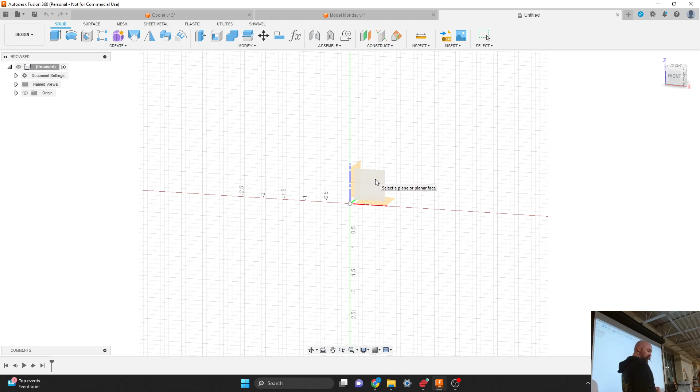How do you do that part? Like, how do you make it move like that? The navigation cube up in the top right-hand. Oh, you're good. You're editing your sketch already. You are already good to go.

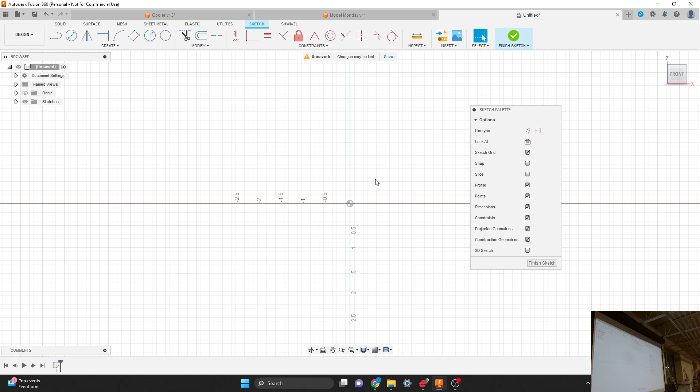Yeah, you are. So you've got all your sketch tools at the top, just like I've got mine. We've got a sketch palette here. So now we can make a circle. Fancy.

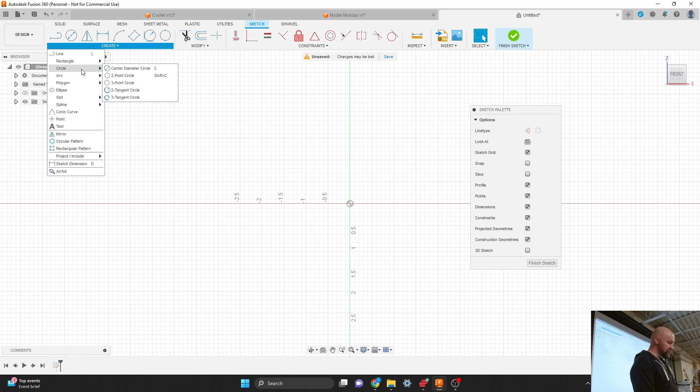So from our Create menu, I'm going to come down to the circle option here, and I'm going to choose to make a center diameter circle.

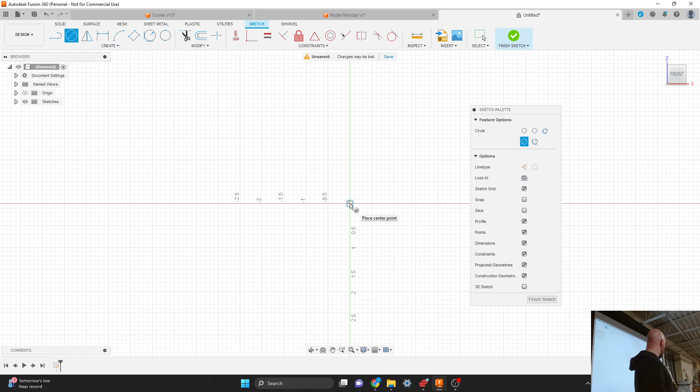Now, if I just stop moving my mouse, it'll tell me what it wants me to do. My Fusion Overlord will command me to place the center point. You may remember from my various words that I say about connecting things to our origin. When you're starting from 0, it's really handy later on if you connect things to your origin, just to fully constrain things in space and in dimension, which we are doing right now.

Something also that's important to note, maybe for beginners, most of the sketching tools are going to be a click, release, and then move, as opposed to a click, hold, and drag. So if I grab my circle tool here, my center diameter circle tool, and I click and I hold and I release.

There you go, that'll work. It doesn't let me. Maybe you have to select the delete object.

So there, if you go to create, and then circle, and then center diameter circle, you'll want to place the center right at the middle there. Now you can click and move your mouse out.

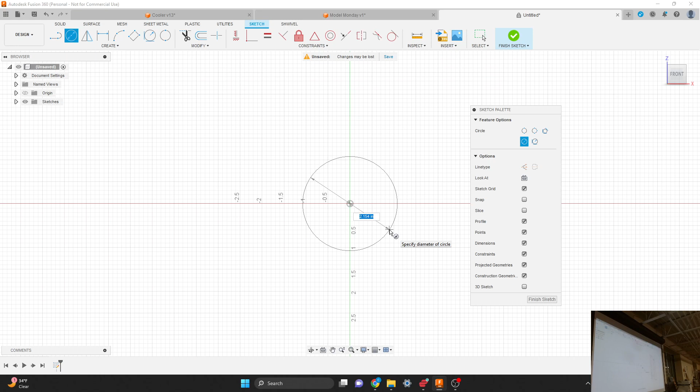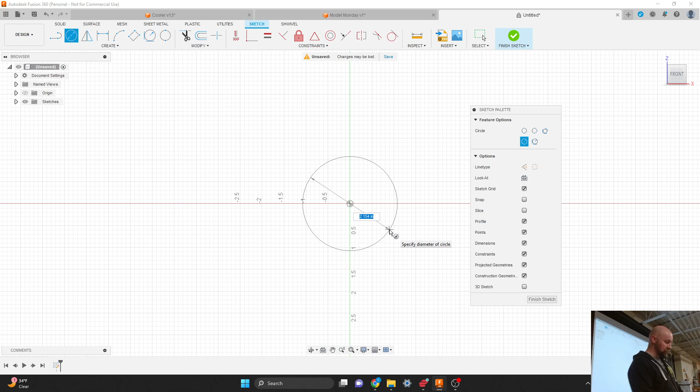All right, the dimension that this particular motor is, probably, yeah, it is definitely based on the metric system, which is not surprising. This is 24 millimeters. If you're not drawing in millimeters, it's okay, don't panic. I am not drawing in millimeters. 24 millimeters, I can just type in 24 and then hit MM.

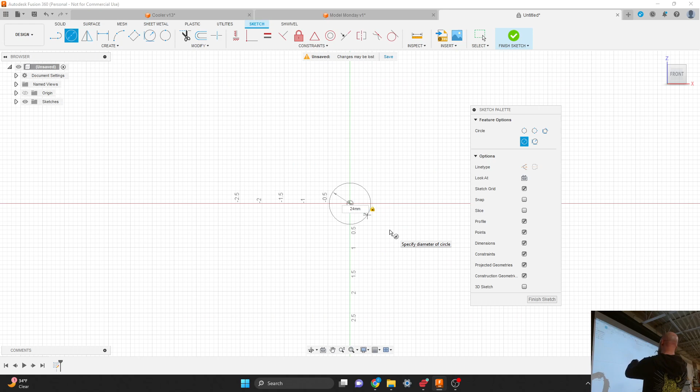An inch is 25.4 millimeters, that is impossible to know for sure. Yeah, this is roughly 0.945 inches. But if I switch over to millimeters here, it's like, oh, 24, right on the dot.

All right, cool. And then I'm going to hit enter. You'll notice it does that conversion for me automatically. So, auto-magically.

If you want to, you can click and drag on this dimension and you can place it somewhere else. I like to put these outside of the circle just to make them a little bit easier to read.

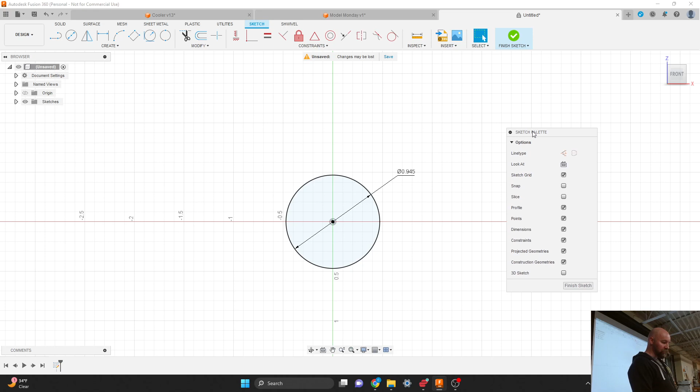And once we've got our circle, we can go ahead and say finish sketch. Maybe it can't be that small. It is not. So this is just the beginning.

So now I'm going to click on my create menu here. You said what was the numbers? It is 24 millimeters. 24 mm. Correct.

That does not look like 24 millimeters. All right, short of deleting it and recreating it, and I didn't, but if I got that wrong, every time I try to click on it, it changes something else. You typed in the wrong number? No, I'm saying if I did, because I was playing with it earlier.

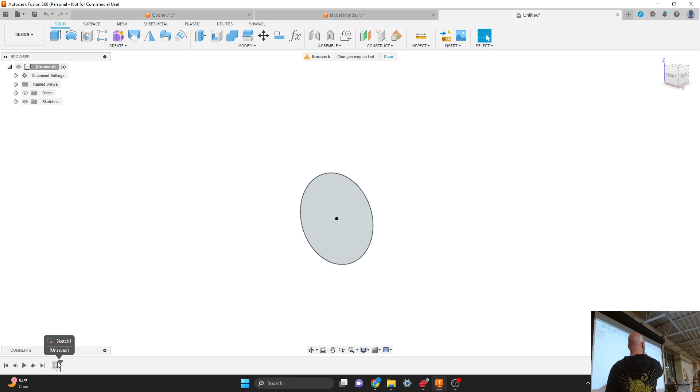No worries. So if we wanted to change something about this circle, and we've already finished our sketch, I can right click on the sketch down in my timeline, and I can say edit sketch. And then I'll go back in time to when I was making the sketch, and now I can double click on this measurement, and I could change that measurement to something else if I wanted to.

Oh okay, gotcha. Or, let's just say, for example, you don't have any measurements to change. Let's just say you made a circle and you forgot to add a measurement to it. From my create menu here, I can find this sketch dimension option. So if I didn't put my measurement on while I was making my circle, I could go to the sketch dimension option. I could click on the circle, and then I can click a second time to place that measurement wherever I want to be. And I could call it 24 millimeters, and if it was a different size, it would change the size of that circle. My circle's kind of small, but it's cool.

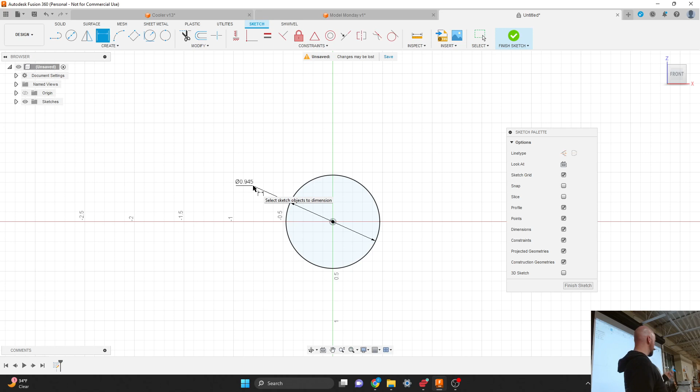It's a small motor. Yeah. Thank you. It's a Ringo-sized motor. All right, now I'm going to go ahead and say finish sketch.

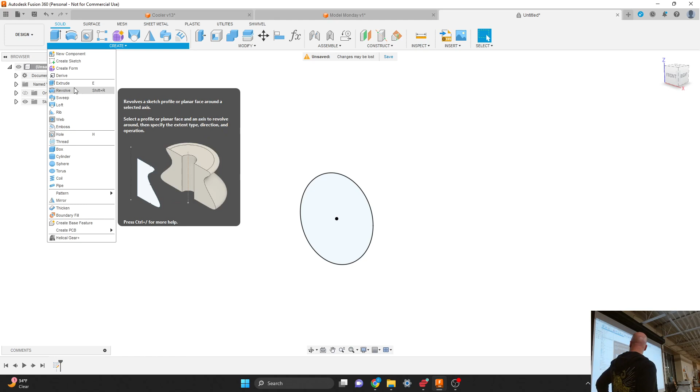Let's go ahead and extrude out this shape here. So from the create menu, I'm going to come down to the extrude option, and I'm going to extrude out this little cylinder here. A grand total of, hey Steve.

You said extrude? Extrude. That's in the create menu? Okay, yeah, I'll try and find it.

Oops, you're still in your sketch. Finish. There we go. Get on your sketch. And I can't -- see, you're such a good teacher. Yeah, you look, people know what to do. I love this, I'm gonna take the rest of the night off. You guys got this, right? Thank you, thank you, thank you. All right, cool.

So once we are extruding, we can choose a distance that we're going to extrude this. So I'm going to, in my extrude window here, I'm just going to choose to make this 28.

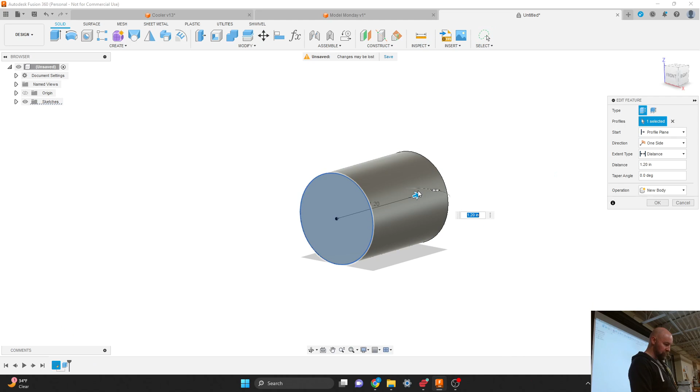Oh geez, what happened? Command Z, Command Z. 28 millimeters.

I know, it's like this motor was designed for the entire world. Well, crazy most. Yeah, yeah, except for Myanmar, Liberia, and the United States. The most free countries. The free world countries. Yeah, exactly. Yeah.

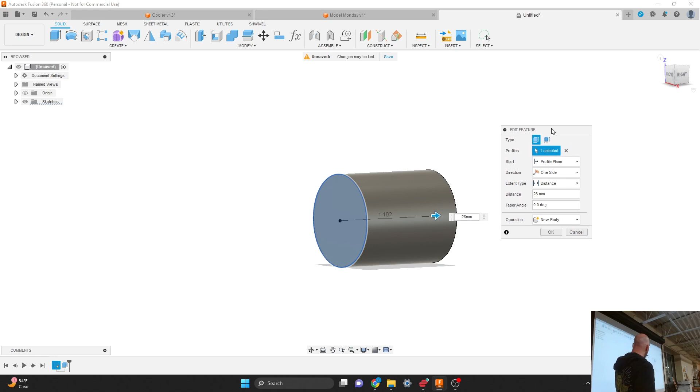All right, so we're making this a new body, 28 millimeters. And I'm going to go ahead and say Oakley Dokley.

All right, let's do some housekeeping. So we've got a sketches folder here that's got an unnamed sketch in it. We've got a bodies folder here that's got an unnamed body in it. Let's go ahead and solve both of those problems right now. This is going to be the sketch that is our motor. Let's just call it the motor.

So to name a body, there's a couple ways you can do it. You can right click on the body and say rename. Mine's not working.

Or the other way is you click, pause, and then click a second time. I'm going to call it the motor. Wait, that was the body? I named my body and my sketch the same thing because I am crazy like that. I'm gonna call it the body.

Wait a minute. Anything is better than body one.

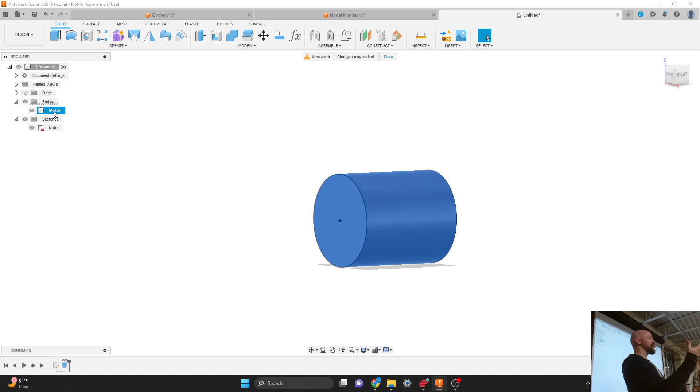Mine just says sketches and origins. That's because you gotta click finish sketch and then it'll show the body again. I did the same thing, I ended up editing the sketch. You clicked too fast. So if you double click on the sketch, you go back to editing your sketch.

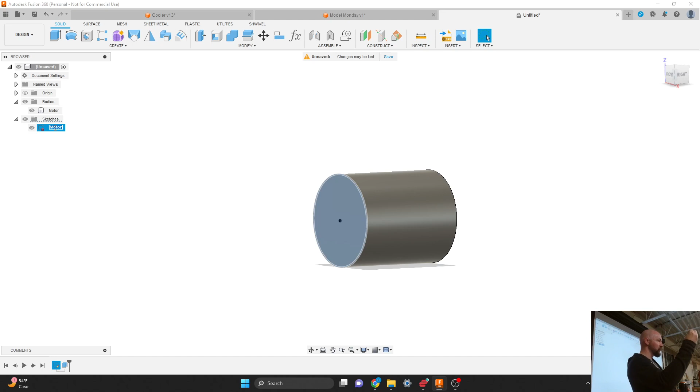To rename, you gotta click, pause, click. You can't be too anxious to rename things, you must exude patience. Patience, Padawans. Yeah, exude and extrude. Exactly.

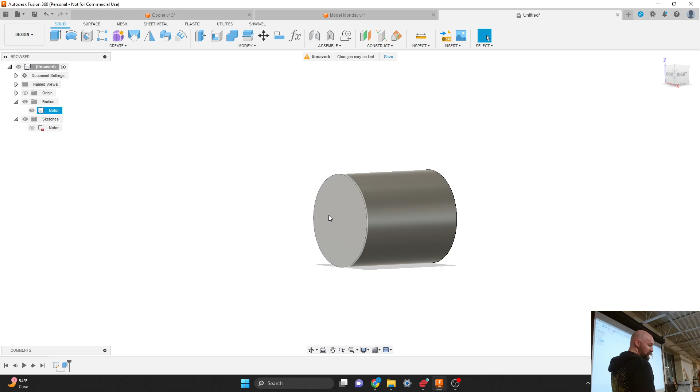So I'm going to hide my motor sketch because I don't really need that anymore. I am going to make the two caps. Our motor here has caps at the front and back, so let's go ahead and make both of those right now. Conveniently, I don't need to make any sketches to make those caps, because any flat surface I can extrude. So from the create menu, let's come down to the extrude option one more time.

Or we're going to actually use the extrude more than one more time, we're going to use it several more times. That was a lie, I just lied directly to your faces and I apologize.

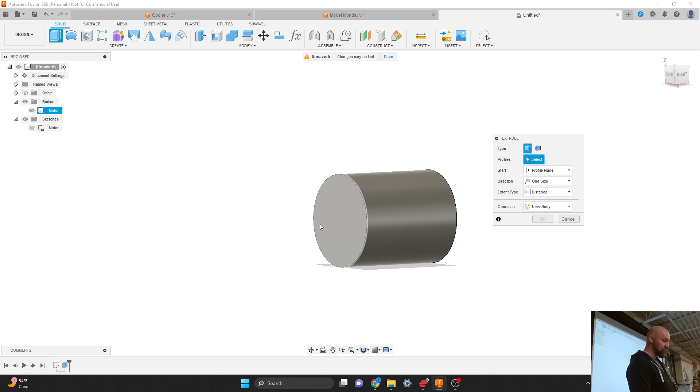So we are going to extrude out one side of our cap, 1 millimeter. Now the operation here is defaulting to join. That's because whenever we've got two bodies that are touching each other, it defaults to say we want to join these together into one body, and we do not want to do that. We want these to be separate bodies. So from that operation menu, we can change it from join to new body.

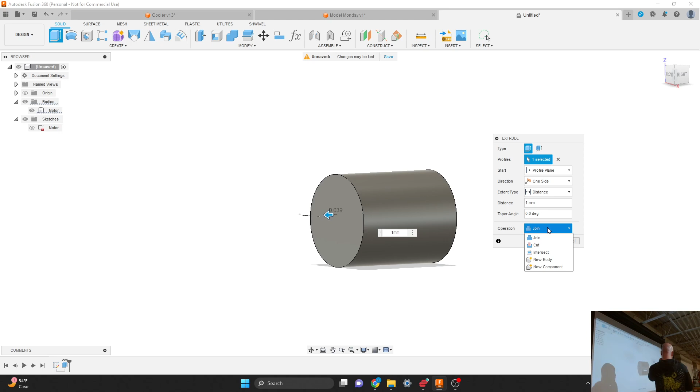What's the difference between new body and component? That is a good question. So a component is a series of sketches, bodies, planes, and joints too. It's a whole set, you can have a whole lot of things in a component. A body is only a three-dimensional object here.

Right now, the component here is our main document. My component is called unsaved, and inside of this component is an origin and some bodies and some sketches. If we were to make this a new component, we would be able to put a whole set of sketches in there. It's like the top level folder structure, kind of like a document or file folder. So we're going to make it a new body. Good question, thank you. And I'm going to say okay.

So we got one at the end here. We got a body we can name. I'm going to name this body the top cap. It's not letting me do that. So you just got to click on it one time, pause for a second, and then click a second time.

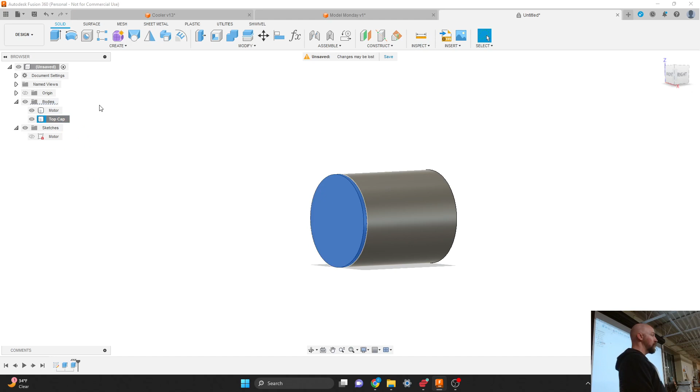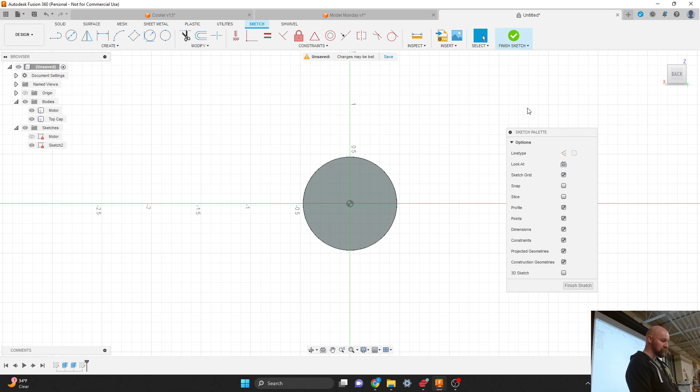All these folders and stuff are closed. And then we're going to also extrude this out the other side, using the exact same method. So from our create menu, I'm going to choose to create a sketch... oh I'm sorry, not create a sketch, I'm going to choose to extrude. Delete that sketch, sorry. Create, extrude, and we'll extrude out our other cap, also 1 millimeter, and make it a new body.

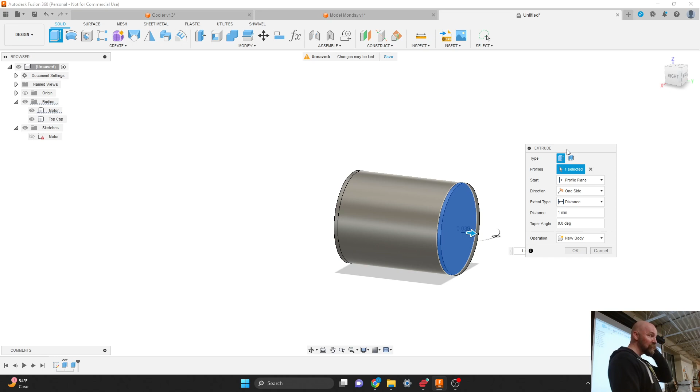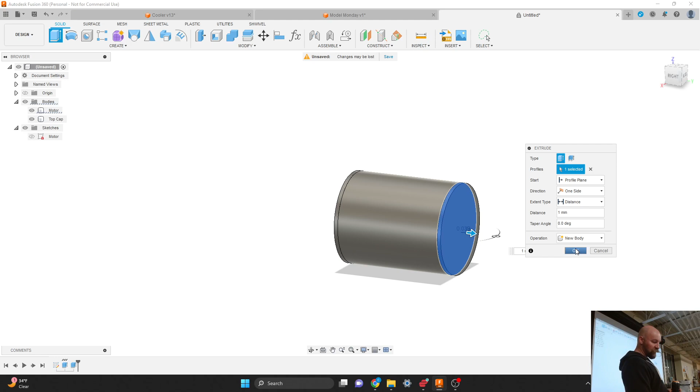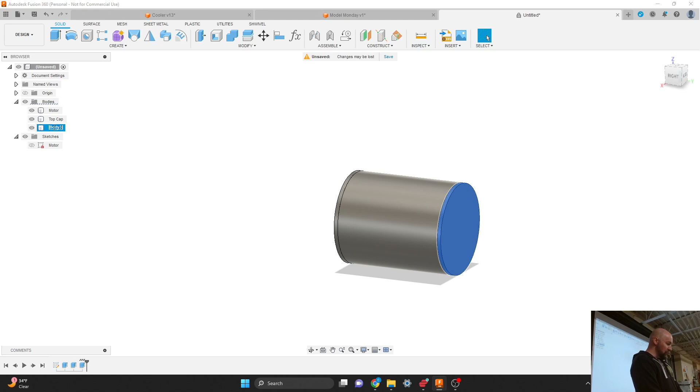Now, something I want to get us in the habit of is to not have a pile of gray on our screen. Right now we've got three bodies, and it's kind of hard to tell that we have anything but one. So as part of my housekeeping, in the modify menu, we can find a couple of different options that change the appearance of our three-dimensional bodies. So I can change the appearance of something.

I can also change its physical material. We'll do physical material later. Right now I'm just going to work on changing the appearance of it.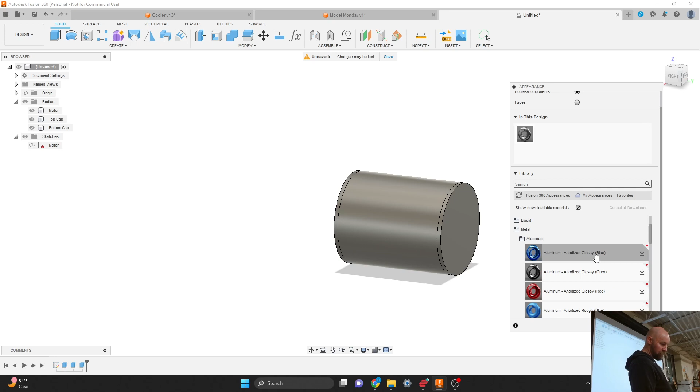If I choose that appearance option, there's a whole bunch of folders here with different materials and appearances. For example, in the metal section, under aluminum, there is an anodized glossy blue, which definitely matches the kind of look I've got going on here with my motor. I don't currently have this material downloaded, so I have to click on that little arrow button, and it'll dance around a little bit, and now it appears without the little arrow next to it.

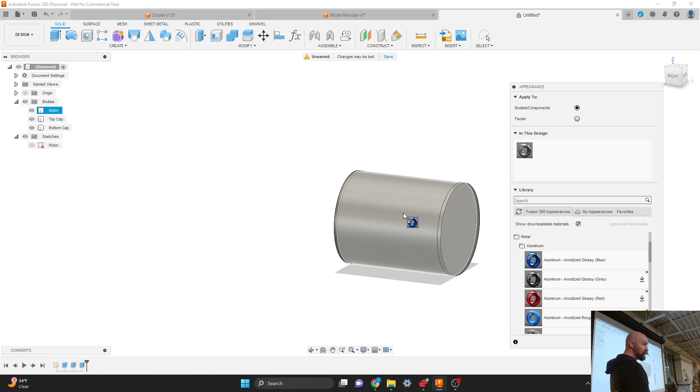Now I can take this material appearance and click and drag it out over the body in my drawing view, or click and drag it over the body in my browser, and drop it on top of my body there. We don't have to stay in black and white and gray — you can live in a world full of all the colors, which is how I choose, unlike Benjamin Franklin in that clip. I choose to live in a world with all the colors.

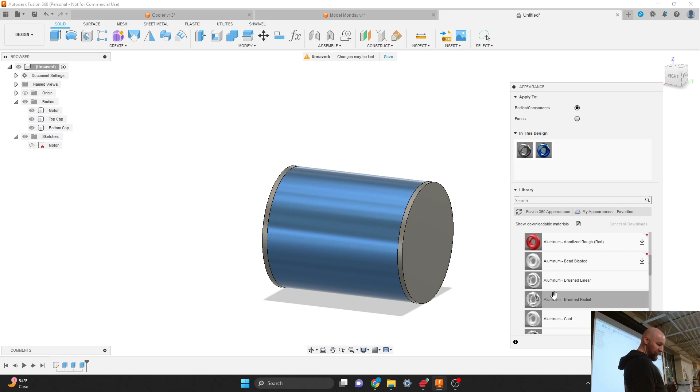It's a wonderful thing. All right, so we've got another piece of aluminum here. The other one I'm going to go with is aluminum brushed radial. I've already got this material downloaded, but if you need to, you can click on the little arrow there, and I'm going to click and drag it out onto my end cap, both of them.

How do I do that? So, are you in your appearance window? Almost. Yeah, so in modify, and then down to appearance, and then you should have a window that pops up. Mine's just taking its time.

Oh okay, it did, it just didn't look that much different from what was there already. Okay, and now if you scroll down, there's a metal section, and then in aluminum, that first one there — you have to click on the little arrow and kind of download it. And now you can click and drag it out on top of whatever body you want to be blue.

There you go. Are we doing those in the same color? Yeah, both sides — I'm gonna make that radial. That's cool. So there's a whole bunch of materials there. I chose aluminum brushed radial for my cap, top and bottom. So in aluminum, scroll down a little bit more.

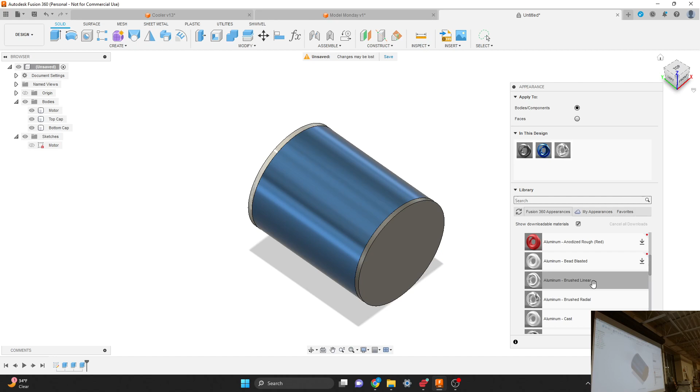Aluminum brushed radial — you gotta download that one too, and then the same way you can click and drag it onto the end cap. Did it work? Yeah, I had to reboot because I had foolishly said yes to updating the project. Oh, all right, cool.

So now, once you've dragged out something one time, it appears in this design folder here at the top, so I don't have to find it in my list again if I want to reuse it. It's right up here, and I can just click and drag, and there we go.

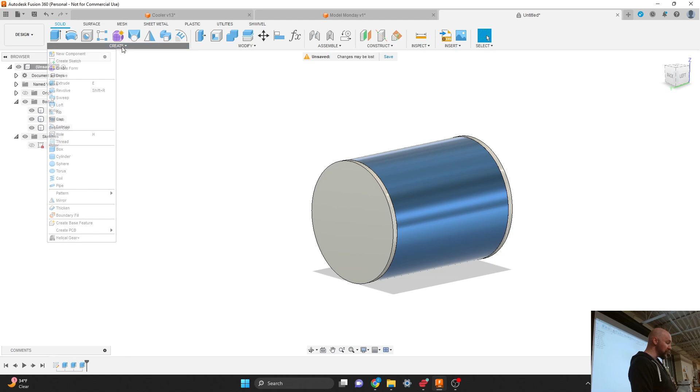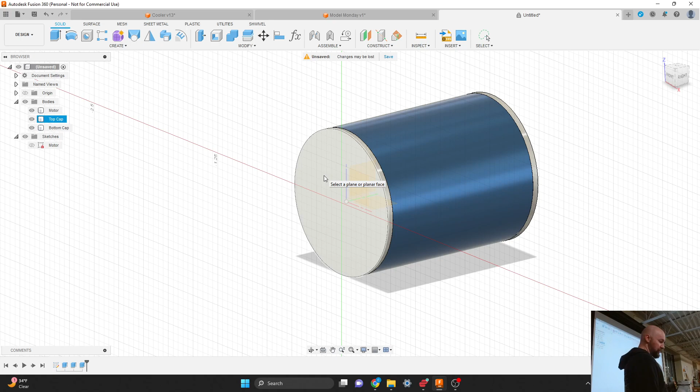All right, let us continue. So let's make the motor shaft end of our motor. From our create menu, let's go ahead and choose to create a sketch. We're going to create our sketch on the top cap, so I'm going to spin around — I suppose it doesn't really matter which side you create it on, just know you'll be creating the other sketch on the other side. So we'll create it on the top cap.

If you're ever unsure, you can always zoom in. Some people end up zoomed in pretty naturally. Oh, you're zoomed way in, way up in here. Well, it's just top to bottom of the screen. Oh okay, yeah, that's all right, you can fill your screen with the sketch. That's all good.

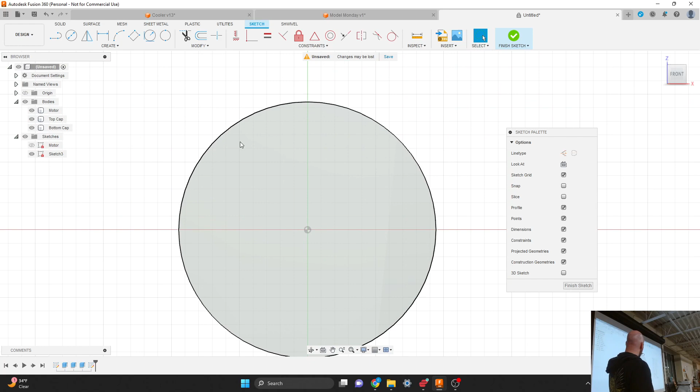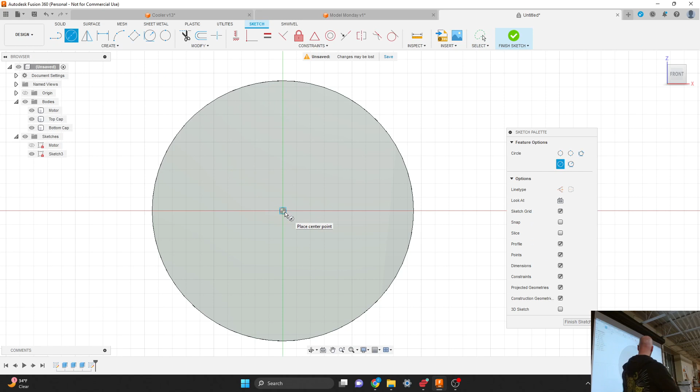So now we'll draw our motor shaft here, just with a center diameter circle. Conveniently, when we drew our original cylinder on the origin, it kind of holds true here to be the center of the circle for the whole time we're going to be drawing this. I'll click and place the center of my circle right at the center of my face there.

And this is a 2 millimeter shaft. I know, that's crazy, why would you make a shaft that small? That is the question I would also have for the manufacturer of this ESC, of this motor. I don't necessarily recommend buying this for your robotic battle robot, you should get a different one. It's a little sensitive there. Yeah, it's a very small shaft.

Unfortunately, I cannot move or see what I'm doing. Is it 2 millimeters? And then, yeah, 2 millimeters, a pair of millimeters.

My other box, try clicking there on create, and then create sketch. It's already in there, I got one in there but I can't see it. There you go, now we're making a sketch. Yeah, that's the second one. Oh right on, oh yeah. So you got 2 sketches that you made down there. That's okay, that's all right.

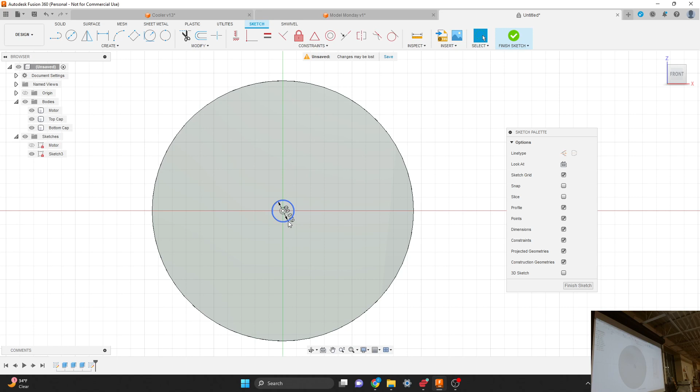Now you can just go to create, and then create your center diameter circle, and you'll place it right in the middle there. And then 2 millimeters, so 2.0, or just 2 mm.

Okay, all right cool. The other thing that we've got here is a hole pattern on the outside here where our mounting is for this motor. And if I remember correctly, there's 17 millimeters. So when I want to make a hole pattern, I think my go-to method is to first define here what the spacing on this hole pattern is.

Let's see, should we do it like that, or actually let's show you how to use the sketch dimension tool. So we're going to make a hole pattern. The hole pattern is going to be a 3 millimeter hole. So if I grab from my create menu, if I grab that center diameter circle again...

So all we did is draw the sketch. We sketched the cylinder so far, and the circle for the shaft. We haven't extruded anything yet. Now we're going to make our hole pattern here. I'm just going to make 2 of the hole patterns because those are the only mounts I'm going to use.

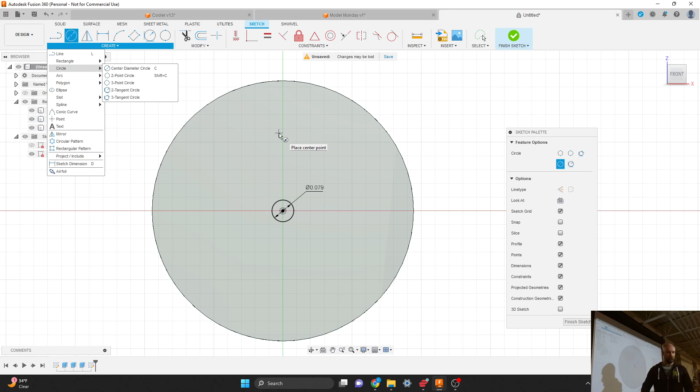Anywhere out there for now, we're going to bring it into compliance in the next step. And this circle is going to be 3 millimeters.

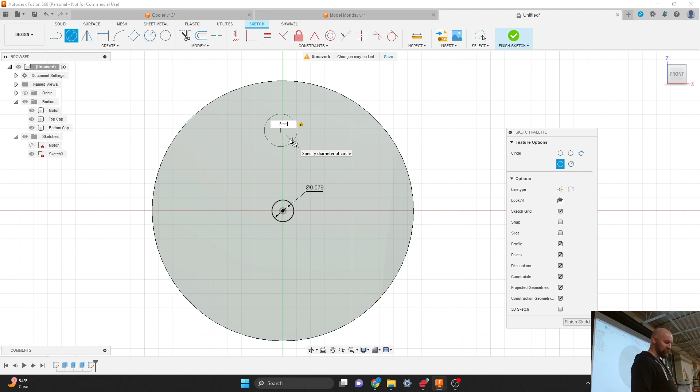The mounting is bigger than the shaft, which totally makes sense, right? 3 millimeters, and it's just floating out here.

Now you can see this is a blue sketch, or this circle is blue, because it's not fully constrained. So it's been constrained in dimension, but it has not been constrained in location. So let's go ahead and do that right now.

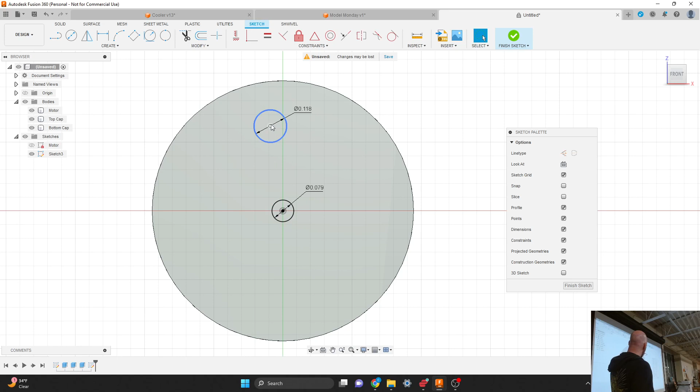So first I'm going to start by defining a distance between the center points of these two circles. There's a lot of circles in my thing, this keeps adding circles. Yeah, you got a lot of circles? I know, like 3 of them.

Yeah, so you can delete some of those, right? You can click on that edge of the circle. Probably because that's so easy.

There we go, there we go. I'm only laughing because I made the exact same mistake. Not this time, but when I first joined the class. It happens, it happens. They're not mistakes, they're opportunities for learning. Happy accidents—there's no such thing as mistakes, only happy accidents, as a wonderful artist I used to watch on TV used to say.

All right, you said 3 millimeters? 3 millimeters, gotcha, 3 millimeters. Circle is in place at the top.

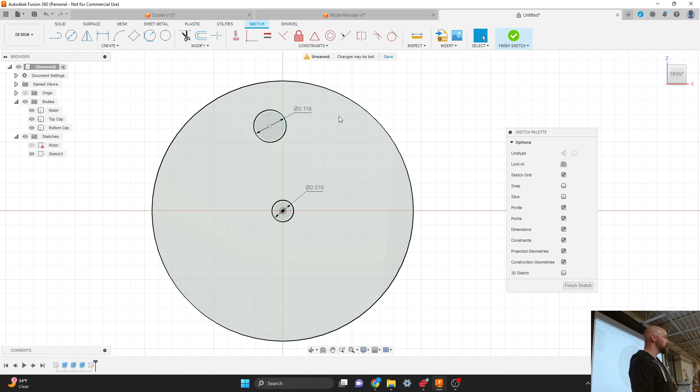What's the difference between a beginner and a master? Somebody who's mastered something has a couple of zeros in their paycheck. I don't know, 1,000 mistakes. All right, yeah, that's great, I like that too.

So like I said, this is an unconstrained sketch. We're going to constrain this now, bring it into compliance. I'm going to do that by first adding a sketch dimension that tells these circles how far apart from each other they should be.

Another general guideline I encourage people to follow: if you've got something selected, click out into the middle of nowhere first. As a guideline, we want to choose what we want to do before we choose what we want to do it to. He also had the middle line selected, so it wasn't floating out in the middle of nowhere—it's constrained to the line on the left side.

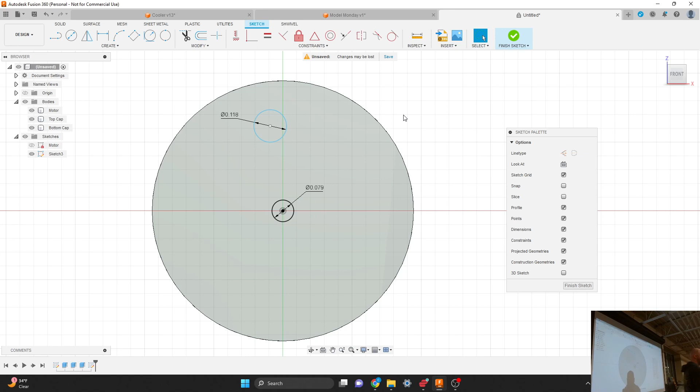I could have got that wrong—two dots, I'm not sure exactly what's going on. It looks like it may be. There's two dots. Oh, that's all right, you're fine. So if we click and drag on this thing, you can see it'll just... well, maybe not, but that's fine. It's fine in its position there.

Oh, this thing works. I just did this because we're eventually going to constrain it there—constrained to this thing right there.

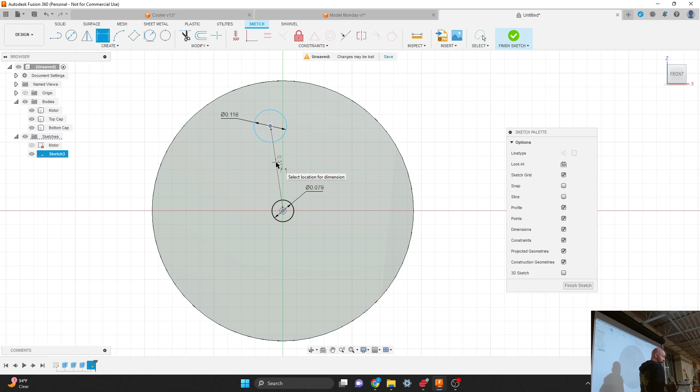So if I click on create and then come down to sketch dimension, and now I choose the center point of my 3 millimeter circle, and then second I click on the center point of my 2 millimeter circle—this is a delicate procedure here. You can see I don't want to place my dimension like this, I want to place it like this. There's a subtle difference: my line is at an angle, so I want to measure the distance between these two things at an angle, not the distance between them this way or this way. I want to measure the distance straight between them. Does that make sense? Then I can just place that dimension.

Now that I've got that dimension placed, I can tell it how big it is. So it is 17 millimeters divided by 2. Why 17 millimeters divided by 2? Because it's really easy for me to measure the distance between those two holes there. It is more difficult for me to measure the distance between the shaft and the hole. Also because I don't like to do math—math is impossible.

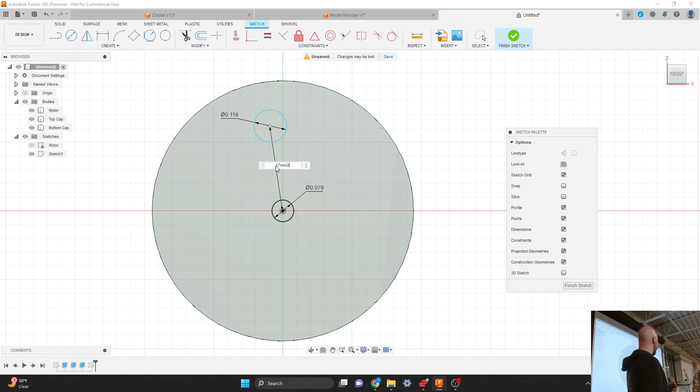Cool, oh sorry, yeah, 17 millimeters divided by 2. I didn't know you could put that right in.

Yeah, you can do math right inside of Fusion 360. Weird, I don't know why, but I'm not getting the thing that pops up to show the difference. So you clicked on one thing—did you click on the other thing? I did, and then you put your mouse in between the two of them. That's what I didn't do.

I think you're good, because you were constrained up and down already. That's what I was looking to do—mine's got like a square going now. Yeah, you're good, you're good. 17 divided by 2 millimeters. Yeah.

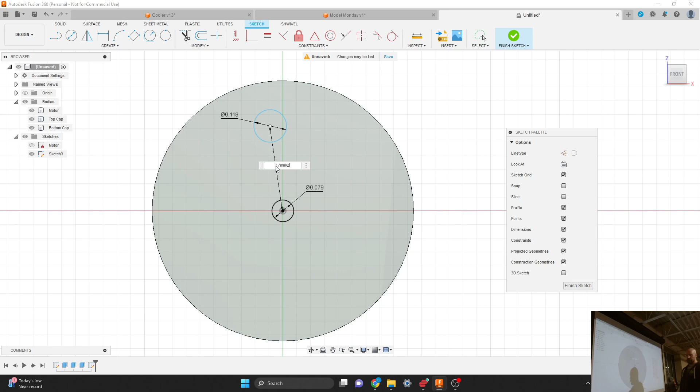17 millimeters divided by 2. And then hit enter. It is red. Do I actually put divided by? Yeah.

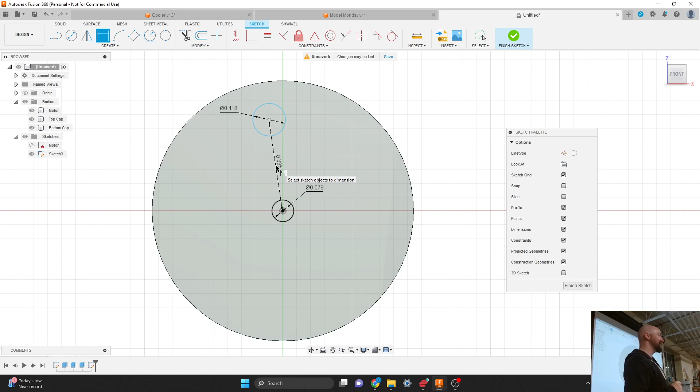Slash, that was the name of my stepmother in high school. It's not letting me put it in that dimension. She was a teacher. All of her kids called her Slash, because when she got married, she changed her name to Slash. She used 2 names, right? It was Grant/Stevens. So all the kids started calling her Slash. So when I moved here to Wisconsin, or to Milwaukee, people started calling me the son of Slash. That's not right. Which is a great nickname, son of Slash.

All right. Finally, what we want to do here is complete fully constraining this. So I can still move this around because I'm not fully constrained in space here, just in dimension from this one other object down here. So let's add a constraint.

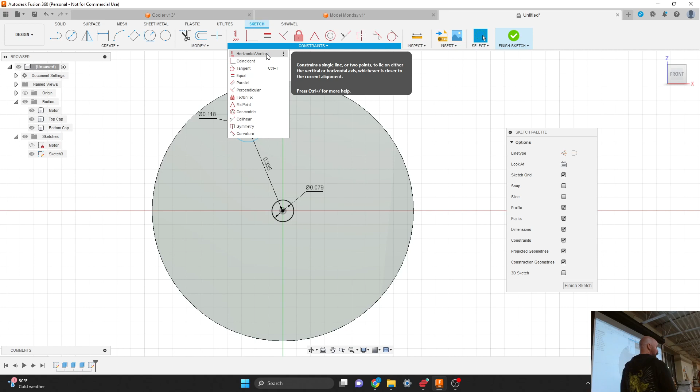From our constraints menu, I can go ahead and choose a horizontal vertical constraint. This is a really handy constraint. I used to think this is only good for lines, but it's really handy when you want something to be directly horizontal or vertical from something else. You hit the constraint menu and choose horizontal vertical, with nothing selected.

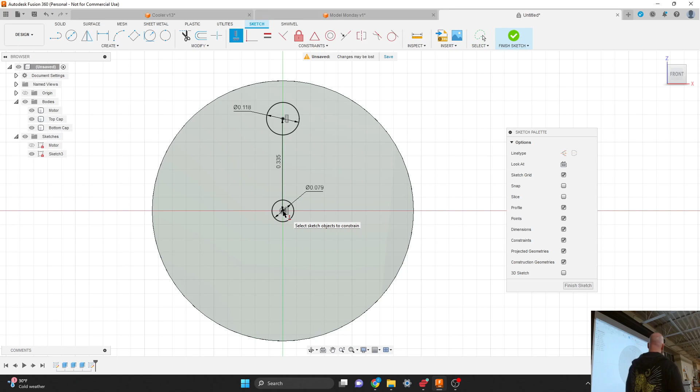And if I pick the center point of my 3 millimeter circle... I never made that, the 3 millimeter circle. Mine is a square. I think we all made 3 millimeter circles. I saw yours, this one, yeah, that's a 3 millimeter circle. You're good, okay.

So I click on the circle, click on the center point of your 3 millimeter circle, and then the center point of your shaft circle, and it should pop right into place. I missed the constraint. Which constraint? The horizontal vertical constraint.

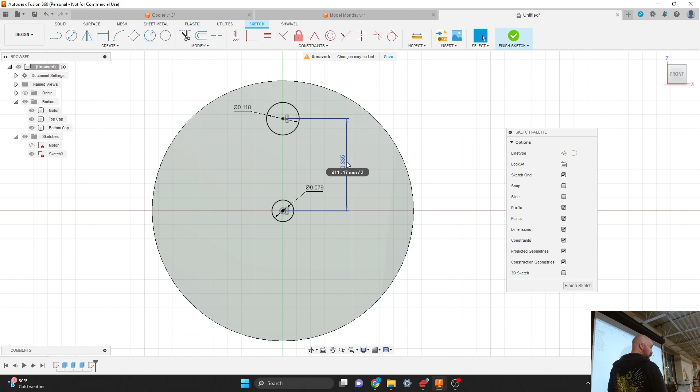This part I didn't do like that, like the circle right there, and how you got the line that goes out like that. This is just a dimension, not really a line, so yours might look like this. It's just a dimension that defines the distance between these two objects.

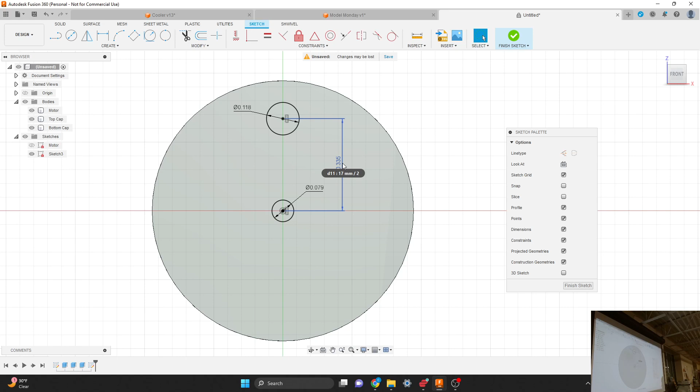Mine is not doing it, I don't know why. I swear, I click here, right? Oh okay, now you walked over. Like I said, it fears me. Mine ended up horizontal, but I'm guessing that's okay. Totally fine, yes.

As long as it is either directly horizontal or directly vertical, that's fine. The real key was just to make sure it's fully constrained and to show you how to make it jump into compliance, because now I can't move it around since it's fully constrained.

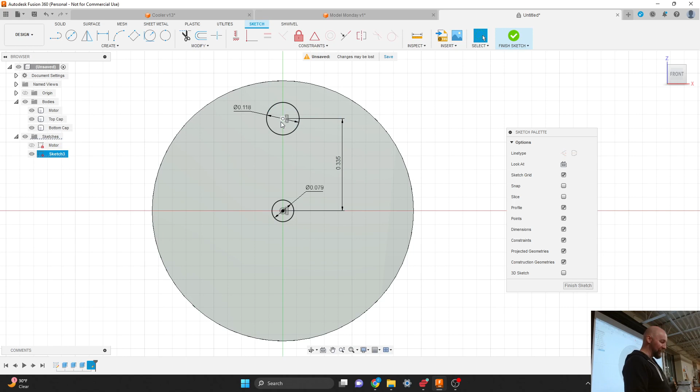All right, so last but not least, in this sketch, we're going to make the other side of this circle, because there's another one over here. There are a couple of ways you can do this. We could do it with a mirror if we wanted to, mirroring this shape over a line that we'd have to draw, but I'm real lazy.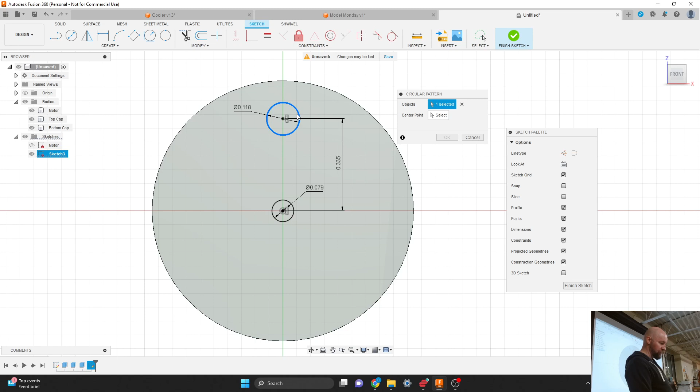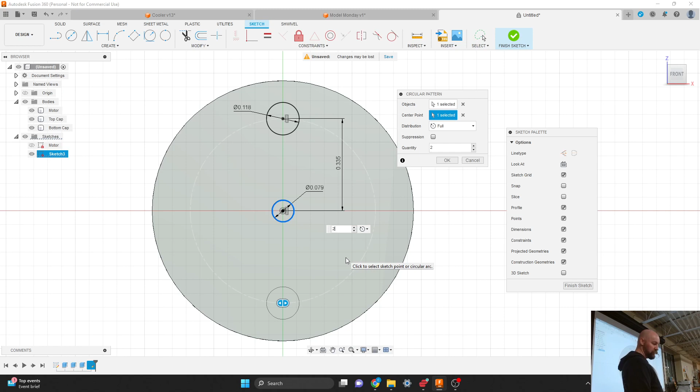So instead of choosing a mirror, I'm going to make a circular pattern, with 2 circles. I'm going to choose that circular pattern option from the create menu, then choose the object I want to pattern, and the center point, and make a pattern of 2, because there are going to be two total. Then it makes our circle on the opposite side there. I'm going to say okay.

Cool, fully constrained I think. Something happened - you did not click on your circle, you clicked on the center of your circle. Ah, so he brought the center of the circle down.

So I'll try that one more time. If you click on create... okay yeah, I got this little thing right there. You're good, you're good.

Alright, create, and then circular pattern. And then if you click on the edge of your circle, not the middle of it, click on the ring part. There you go.

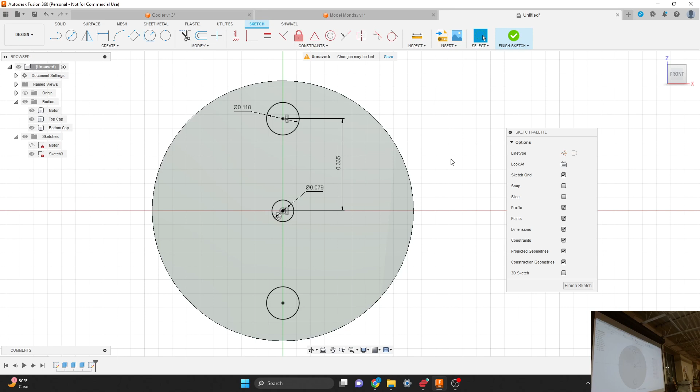This one, there you go. And then you'll change that to 2 instead of 3. Alright, cool, cool, cool. I'm gonna go ahead and say finish sketch.

And we can come out and do a couple things here. I'm gonna click on my create menu, then my extrude option. I'm gonna click on my little shaft and extrude out my shaft.

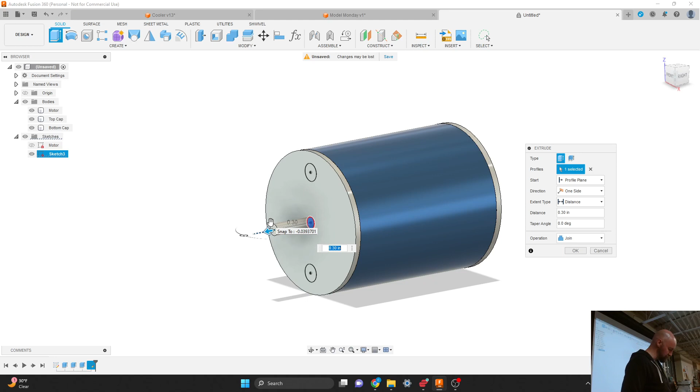My shaft is - where the box is. My shaft is 15 millimeters.

Instead of join here, instead of join, we are going to make this a new component, because if it's a new component, then we can make it rotate later. In order to use anything from this assemble menu, in order to make any joints, you need to have multiple components in your document.

We haven't really talked about this. Components are kind of an advanced thing, I'll talk about it later. So we're gonna make it a new component because we're gonna need its own component later anyway, so we might as well solve that problem now.

So instead of join, I'm gonna say make that - sync is lost, just letting you know. I'm super lost. I'm trying to get it to zoom in so I can see it better, but I can't really see exactly what I'm doing. So if I get lost, you just gotta go to your home.

There you go, but it's still too small. Yeah, something is real small. I think we only got that one sketch. Yeah we just zoomed out a little bit too much, really zoomed out. Just two fingers on the mouse pad at the same time, that'll zoom you in and out. Nice, there we go.

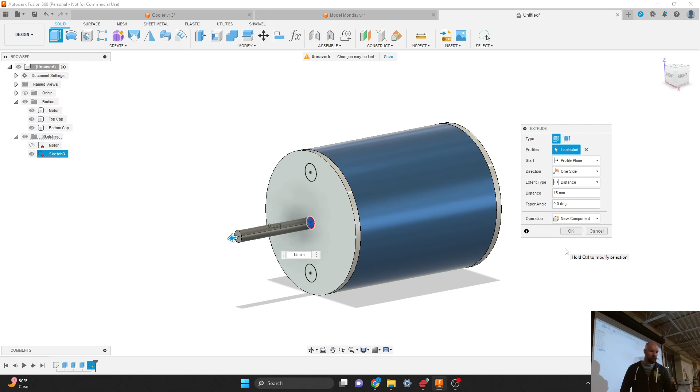And you're gonna extrude that outward 15 millimeters, and the operation is gonna be a new component. I think you hit OK too early. That's okay - if you accidentally hit OK too early, you can, down here in your timeline at the very bottom of your screen, right click on that extrude and say edit feature.

What is that? What is really going on - whoa, hold on now, he hasn't taught us this yet. Yeah, there's something else that's popped up. I don't know, I'm trying to create a hole or something. There's a hole or something that just happened. When I click this, it's gone now.

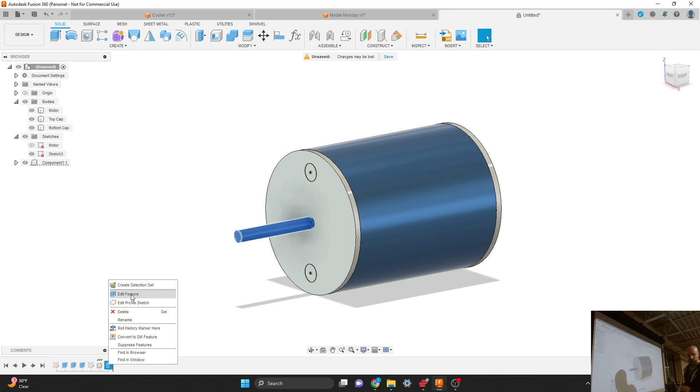You gotta right click on it instead of left click - that was something. And then say edit feature. That was crazy stuff. And then here, you can change your operation instead of join to new component. New body? No, new component, new component.

Going down, I can't go down - am I? He doesn't have that option. I don't have that option anymore either for some reason. Why don't I have that option? That's weird. It says it creates a body in the active component.

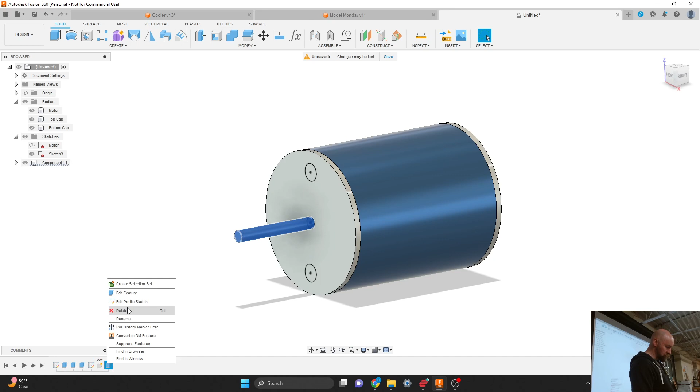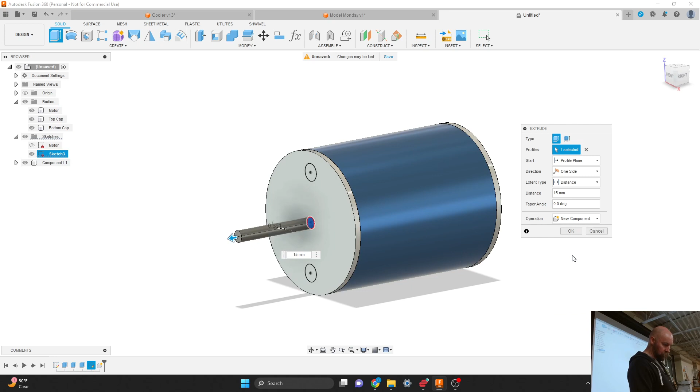Yeah, I don't have it when I can choose the extrude that 15 millimeters new component. I can choose it off the beginning, but apparently I can't go back and make it a component. Now I have two components.

Alright, so with the last 3 minutes here. Okay, I think the last things we're going to do are extrude out our mounting holes. So from our create menu - we're gonna do the new body on the last one, right? - the last thing we're going to do is just extrude out our mounting holes here.

Right, but you told me to click on the center circle in the middle, and then we didn't have that one. Oh yeah, new body will be just fine. Okay, sorry. And then the next step is we're going to come up to the create menu, and we're going to choose the extrude option, and I'm going to pick both of my mounting holes here.

If I push them into the body, mine are gone. It may be that the sketch is turned off, the visibility on your sketch. There's a little eyeball icon, it's under that little triangle for your sketches.

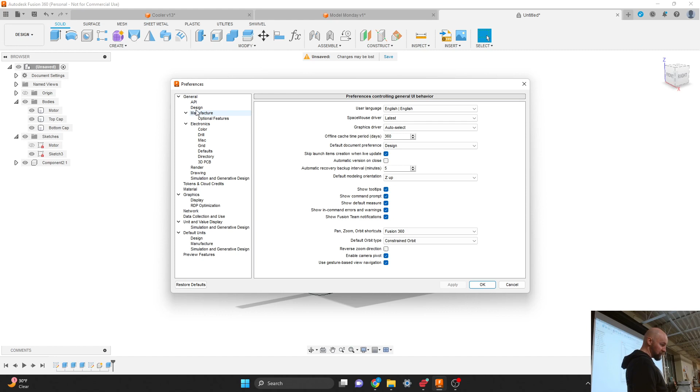If you want to turn off that auto hiding of sketches, I believe it's in the design area. There's a bunch of tabs off to the side. Is it in here? Yeah, here we go. Auto hide sketch on feature creation.

That is probably checkboxed by default. If you uncheck that auto hide sketch on feature creation, then it will not turn off those sketches after you extrude from them. So, apply or okay? I would go with both if you change something.

How far did we get on that? We were about to click on the holes. Yeah, so that's where we're at right now. We're clicking on our two holes with the extrude option, and we're extruding them inwards. We're choosing to cut.

How far? We're gonna go 1 millimeter. For me, I have to go negative 1 millimeter, because we're just cutting through our top part here, that's the only thing we want to cut through.

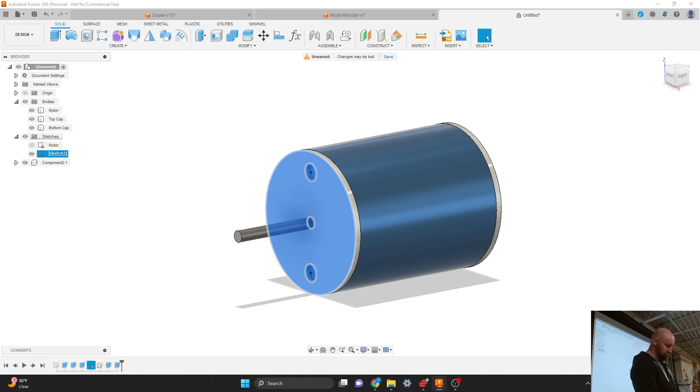And then for extra credit, I'm gonna name this sketch my shaft side.

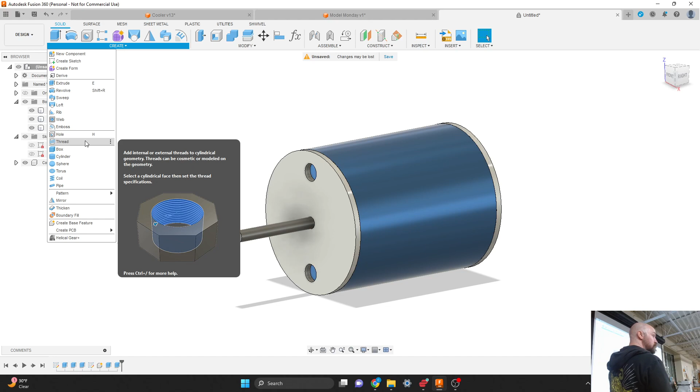Just for fun, for extra credit, these are threaded holes in my actual part here, and we can make them threaded holes in the real world too. You have different kinds of threads, like Acme threads, so many threads. And Fusion is really good about automatically picking which thread.

So this hole is a 3mm hole. If I choose that as the face I want to make, right now it's set to ANSI unified screw threads. If we change that thread type to ANSI metric M profile, it recognizes that's a 3mm size hole and changes accordingly. You can pick which thread pitch it is, and the class, I believe, refers to the tolerance of the threads. Some threads have a different tolerance you can change.

Is that right, Nick? Yep, they have sizes, there you go. So it kind of changes the hole size. Is it like sloppiness, kind of? Yes, it just says auto. But depending on the material your thread is made of, you may or may not need more or less sloppiness for expansion or whatever the case may be.

When Nick's making parts for the space shuttle, you got to know how your cryogenically frozen bolt is going to behave in its threaded hole. Yeah, all right, I am gonna...

You don't have to make this a modeled thread. Making it a modeled thread adds a lot more geometry and can slow down your computer, but they also look cool. So I'm gonna make it a modeled thread, and then I'm gonna say okay.

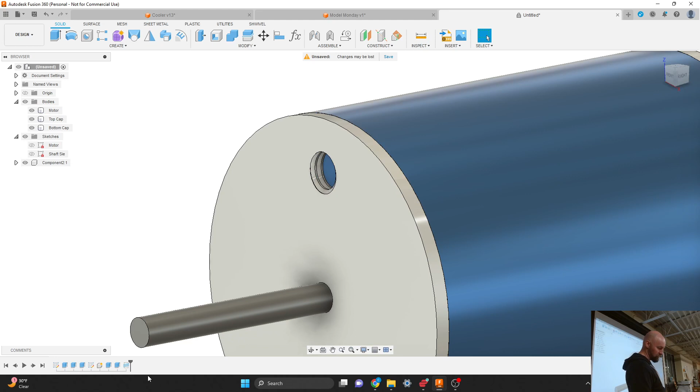Oh, do you want me to? Are you still looking at it? Yes, I was, I'm trying to figure out how to get the hole in there. The 4G, 6G, or mine is not letting me read.

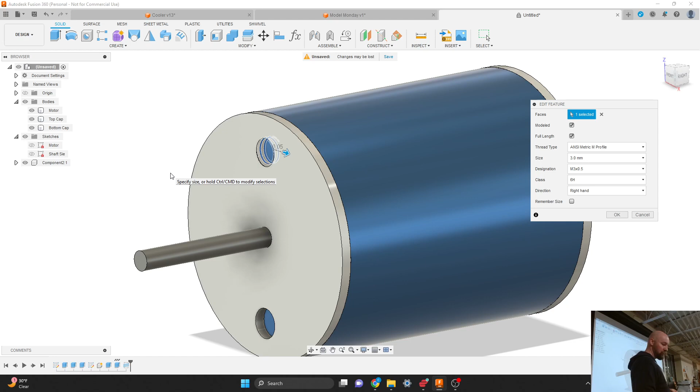Why does it say I don't have an option for 6H?